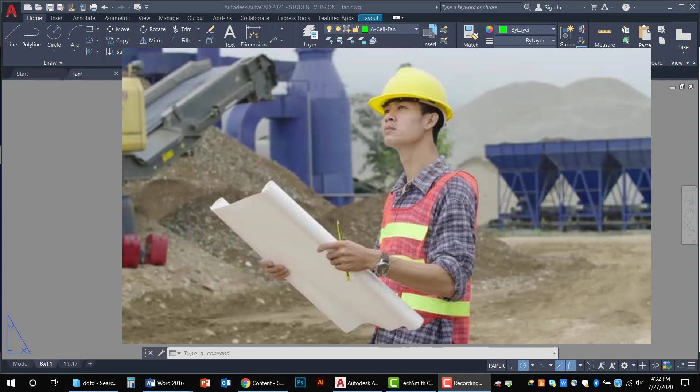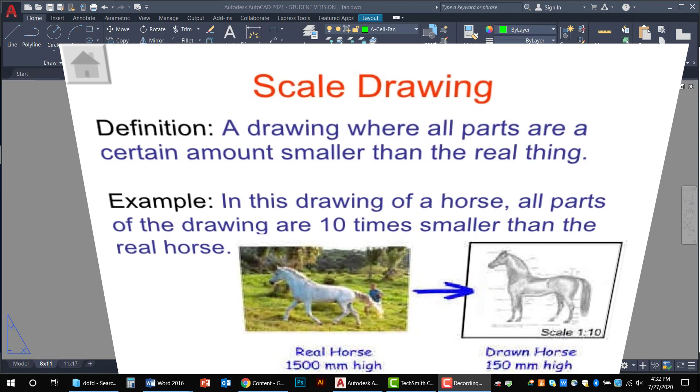Printing your drawings to scale is super beneficial to people who are out on the job site who may not have access to a computer, because there might not even be electricity on the job site yet. A scaled drawing is a smaller version of the object that is going to be built, and it's also a measurable version. Using an architectural ruler, we can measure just about anything that is sized to fit on a piece of paper so that we can build it in real world sizes.

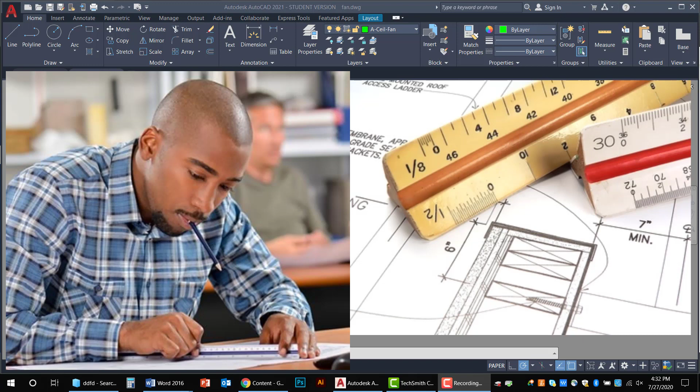For instance, if something is scaled to 1/4 inch equals 1 foot, it simply means that for every 1/4 inch that you measure on the paper, that 1/4 inch should be measured as 1 foot out in the real world.

Once your page setup is complete and you have the correct size pretend piece of paper with the right printing boundaries, and you have a title block set up, the next thing to do is position your drawings within the title block. This square that you see right here is called a viewport.

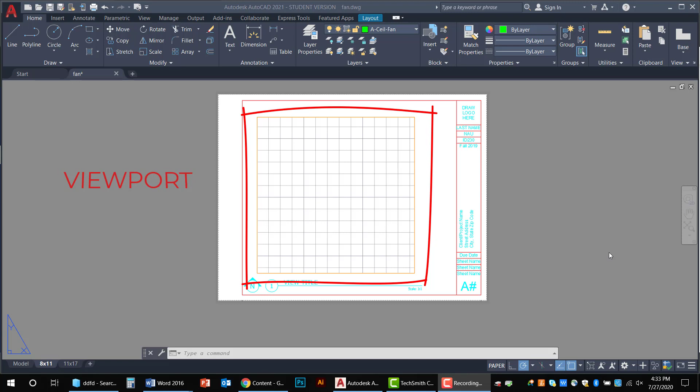A viewport is basically a wormhole into model space, or if you want to look at it this way, the border you see is merely a picture frame. So your picture, or what you see inside the frame, is model space.

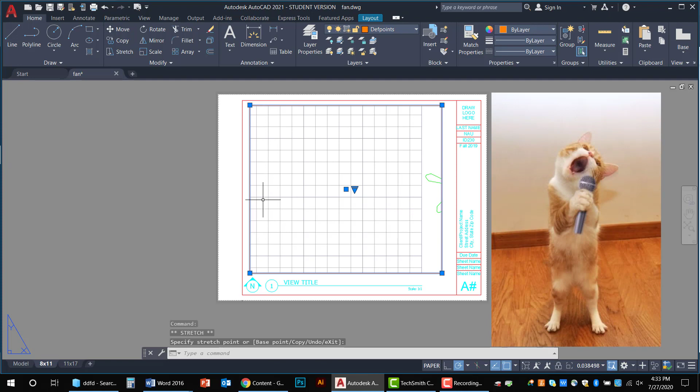Now you can size your frame any size you want by simply clicking on it and moving the grips around. You can also size the picture inside the frame, and we do that through what's called scaling.

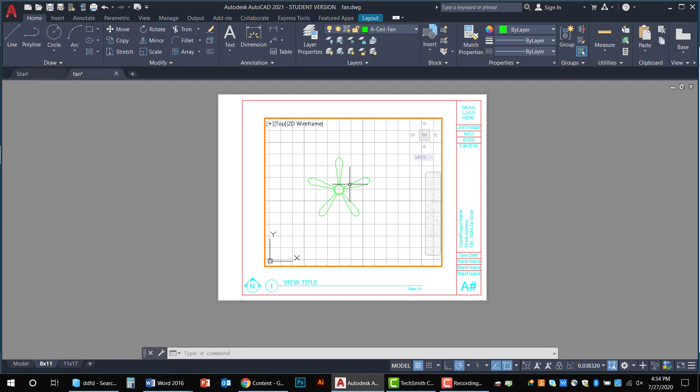Scaling is basically zooming in or out on the picture that we create, but in a way that can be measurable. If you double click inside, you can use your pan hand, you can use your center wheel to zoom in and out, and that's all we're doing, zooming in and out. I'm going to double click outside to unactivate the picture so that then I can just work with the frame.

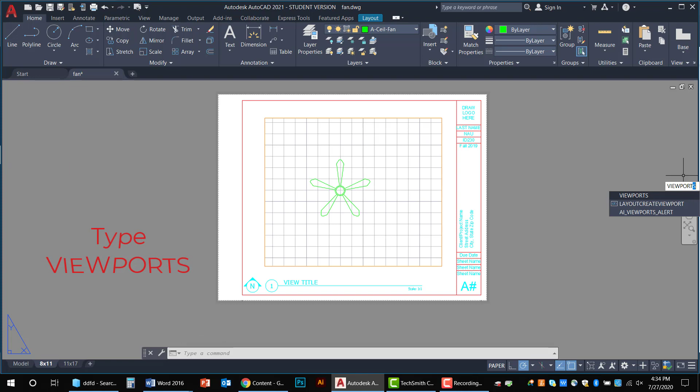See how that works? Now, if you don't have a viewport in your layout, you can add one. Simply type viewports, enter, and this window pops up, and you can decide what kind of viewport you want.

I almost always choose single and click OK. Then your cursor prompts you to draw a rectangle, just like the rectangle command that we learned earlier. Once you click that second click, it becomes a viewport, and you can see everything that you have drawn thus far.

I'm just going to get rid of that one because I don't need it since I already have one, but I do want to point out that some sheets in your construction document set are going to have multiple drawings, and some of those drawings get their own viewport because the drawings might be scaled differently from one another.

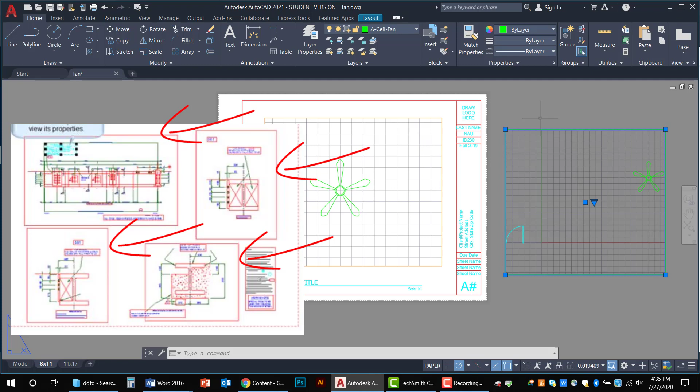So know that it's okay to have multiple viewports on a single sheet. It's just that for some of these smaller sheets, like what we're doing with 8x11 and 11x17, you probably only need one. So I'm going to go ahead and delete that.

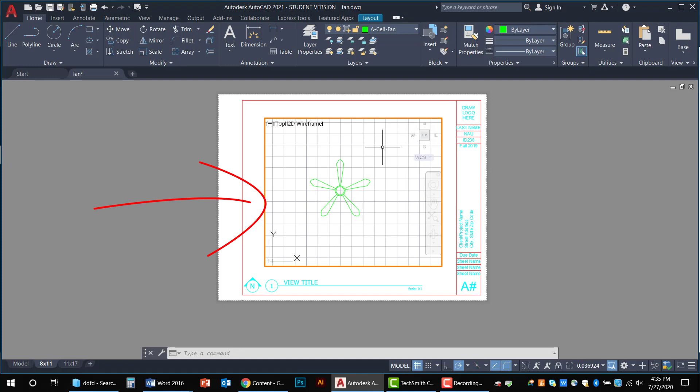So I just want to double click inside the viewport one more time. This is called activating the viewport. The border gets bold when the picture, or model space, is activated, and you double click outside of the frame in order to adjust the frame itself.

I just wanted to show you this because it's super important for understanding the behavior of viewports. Whenever you see the grips, you know that you are working on the frame aspect. When you don't see them, but you do see that the border is extra bold, that's how you know you're working inside of the picture, or model space.

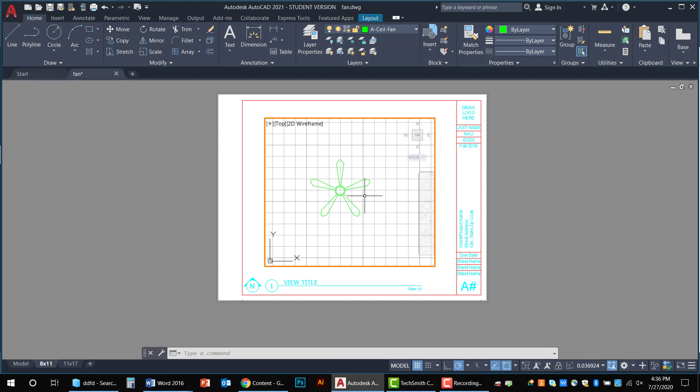Now this frame will have its own layer, and that layer is called defpoints. Def points is a layer that you see on the screen, but it never ever prints. My template already has def points. If I come to layer properties and scroll all the way down past the A's, here is def points. Now if you're not using the template, you do not have this layer, so simply create a new layer and name it def points.

It can be all small letters, or you can put a capital D. I think it remembers either way. Don't forget the S on the end of it though. So AutoCAD actually knows the name of this layer.

Again, you can come here and create a new layer and name it defpoints. I'm just going to exit out because I already have defpoints. AutoCAD already knows the name of this layer, and once you name it, it's going to update the layer with all the parameters, including the ability to be seen and not printed, which is what this little printing icon is right here. So if you look closely, like a wall, it looks really bright, but on defpoints it's kind of grayed out. That's how you know that layer is not going to print.

I always choose a color for defpoints that is not in the AutoCAD color bar. When I double click on the color, it brings this up — these are the AutoCAD colors. This is what your plot style will read. Your plot style will not understand any of these colors, but because defpoints is not a printable layer, I don't care. I want a color that I can recognize separately from these, so I always pick orange or purple, whichever one you want to work with. I tend to go with orange more than anything. Once you have your color picked, click OK, and here you are.

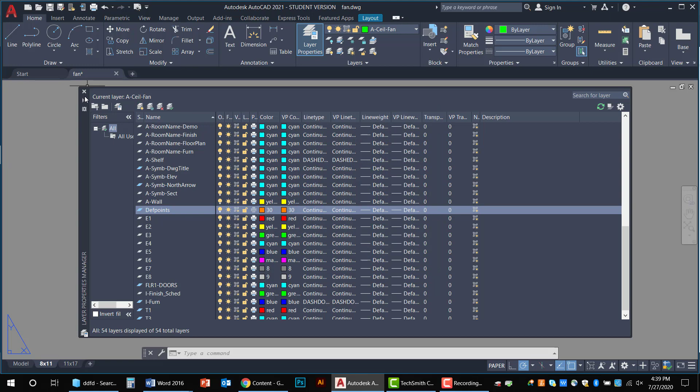I'm going to cancel out of this and come back here. If I click on that, you can look up here — it is assigned to the defpoints layer. If it's not assigned to the defpoints layer, simply click on the scroll bar, find it, select it, and it will assign just like that.

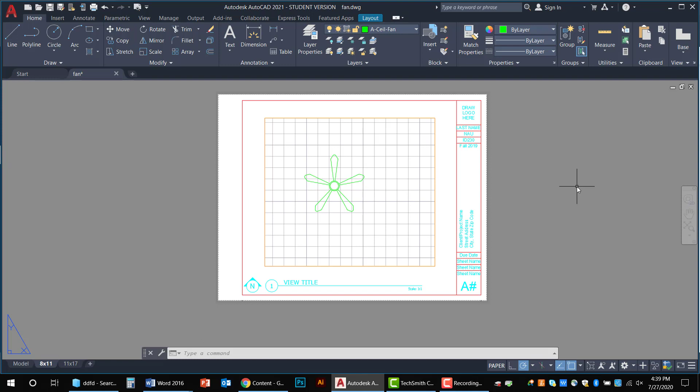There's defpoints. So once you have your frame size set on your paper space, like within this title block drawing area, and since we don't really know what it's going to be doing, I'm just going to drag it out something like this. Then it's time to start scaling the picture inside the frame.

You start scaling by either activating the model space by double clicking inside, or you simply click once on the frame itself so that you see the grips. Either way works, but once it's selected or activated, you should see a new option down here. Things change a bit, and you'll see a scroll bar with something that looks like a decimal number. When you click on that, you'll see all kinds of scales that you can work with.

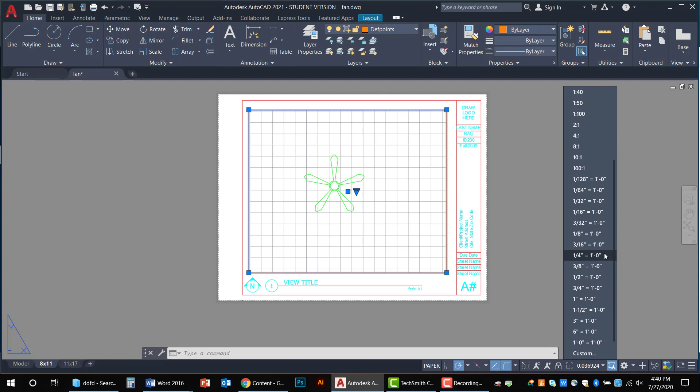Now these ratio scales, like 1 to 8, 1 to 10, are more of an engineering scale, and those are for super scaled buildings or things like that. But we're architectural, so we deal with these types of scales down here. Let's set our ceiling fan to 3/4 inch equals 1 foot scale, and what it'll do is bring it up.

Now sometimes it'll happen that you can't see your drawing in here. It's okay, just double click, and you can always use zoom extents to find it, or use your pan hand to drag it around. But I always try to center it within a viewport as best I can.

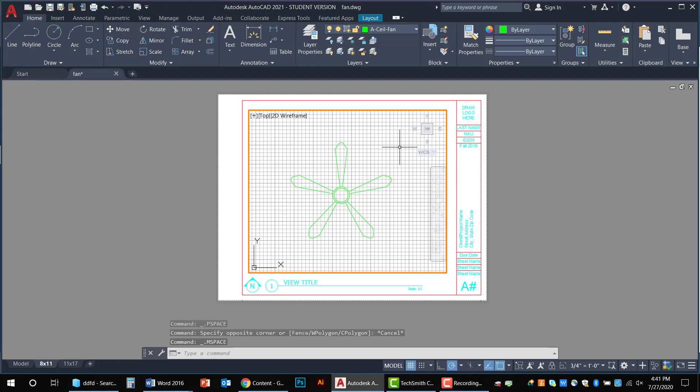Now if you want to get rid of that stupid grid you see down here at the very bottom, right next to where it says model, it's the grid mode. Just click on that to turn the blue off, and you'll see that your grid goes away.

Now if for some reason when you activate a viewport you don't see this navigation bar — it happens from time to time — just type NAVBAR and hit enter. Even if it doesn't show up, click out and then click back in, and then you should see the navigation bar all over again.

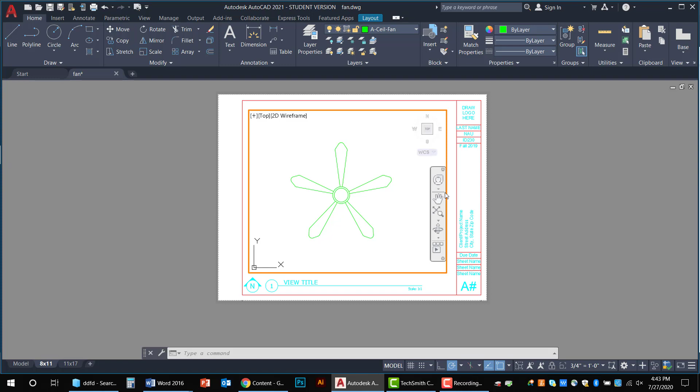Once you have the object scaled to fit inside the title block, I suggest that you lock your viewport. I also suggest that you make the viewport kind of snug around the drawing. We don't need big giant viewports taking up everything. I always try to keep things concerning whatever drawing I am scaling around that drawing.

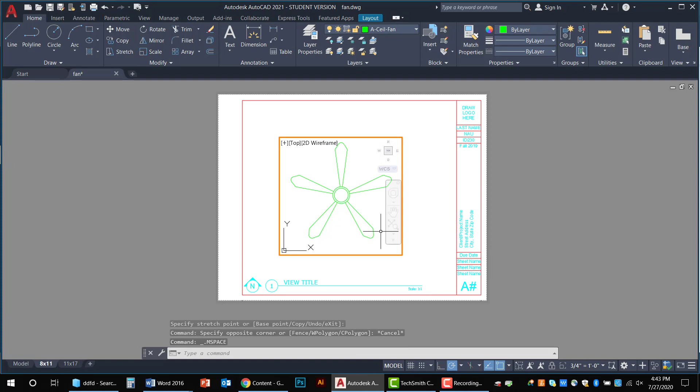To lock your viewport so that you don't accidentally bump it—as soon as you change the zoom of your viewport, it's no longer scaled. You can tell by coming over here and looking, and yep, it's not on 3/4 anymore. Let's get it back on 3/4 and get this centered. Here we go.

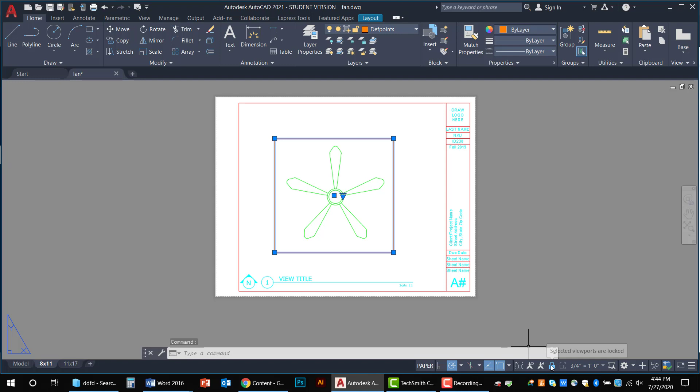Just click this little lock down here and it will lock it, turn it blue, and now you can't accidentally zoom in or out—you're just zooming the actual page. So that's always a good trick: as soon as I get it scaled and positioned, I grab the viewport and hit the lock button. Of course, to unlock it, make the lock unblue, and there you go.

Is unblue a word? I don't know. I kind of like it.

Unblue. Alright, so once you have your image in your viewport and it's locked and set, come down here to the drawing title and fill out the information. Double click on it and you'll see it has a little window, and you can click on each one to decide what to give it. Always name it for what it is—so this is a ceiling fan.

Some people are okay with it not being all caps, and some want it to be all caps, so just check with your project manager or instructor to see what they want. I'm cool with it not being in all caps. So: ceiling fan, and then I'm going to add a dash, plan view.

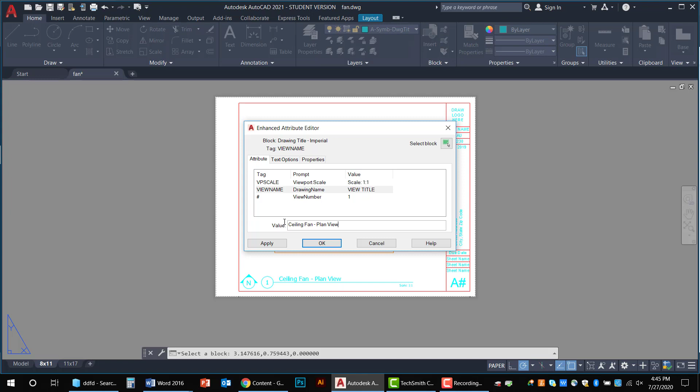It's always good to indicate what view this is—is it an elevation, a section, or a plan? Now the view number is the drawing number on the title block. Some title blocks will have multiple drawings—drawing 1, drawing 2, drawing 3. Since this is the only drawing on this sheet, it's just going to stay at 1.

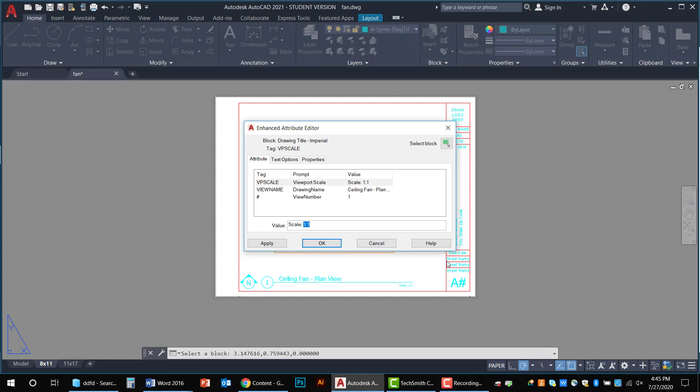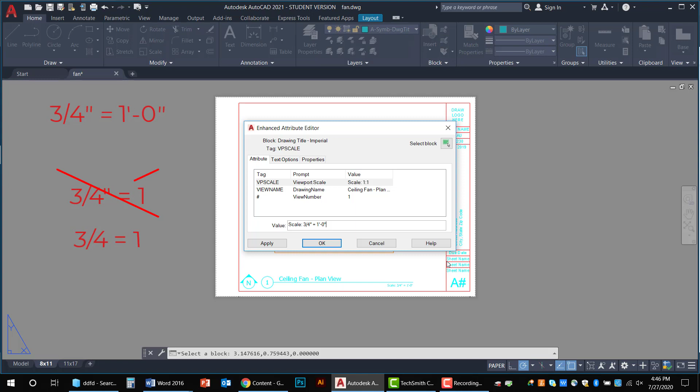And then I need to update the scale because it's not a 1-to-1 ratio—it is 3/4 inch. Make sure you put the quotations, space, equal sign, space, 1 apostrophe dash 0 inches. Make sure your scales always read this way. Do not leave off the dash 0 inches, do not put 3/4 inch equals 1, and don't forget the quotations. They should always look exactly this way. This is tradition, this is what is expected on CD sets, so it's up to you to learn the traditions.

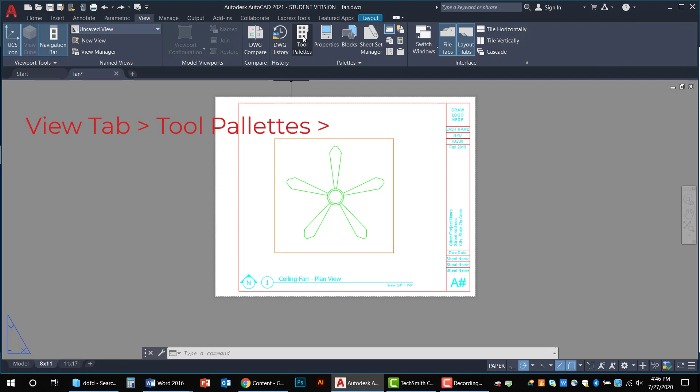Now, some of you might not have this drawing title, which is what that is essentially called. If you want to find it, go up to the View tab in your ribbon, go to Tool Palettes, find the Annotation tab—usually the third one down—and it is Drawing Title Imperial. If you're working outside the States and use the metric system, go all the way down to find Drawing Title Metric. But here in the good old US of A, we use Imperial.

So Drawing Title Imperial—click on it and you'll see that you can bring it down and it creates a new drawing title for you.

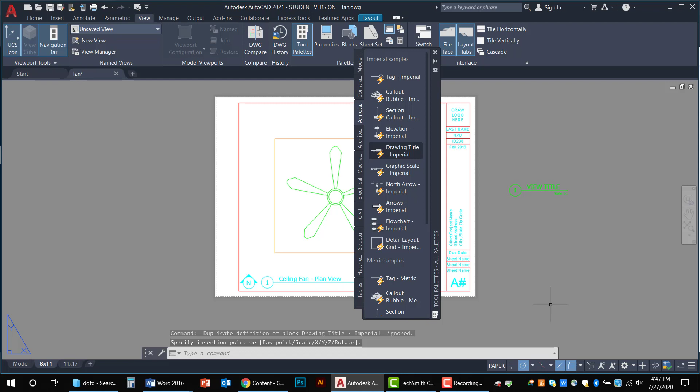It's good for a drawing title to be located close to the object, but not too close, if that makes sense. You need some breathing room—don't crowd it out. This isn't a protest, people, this is social distancing done right: not too far, not too close.

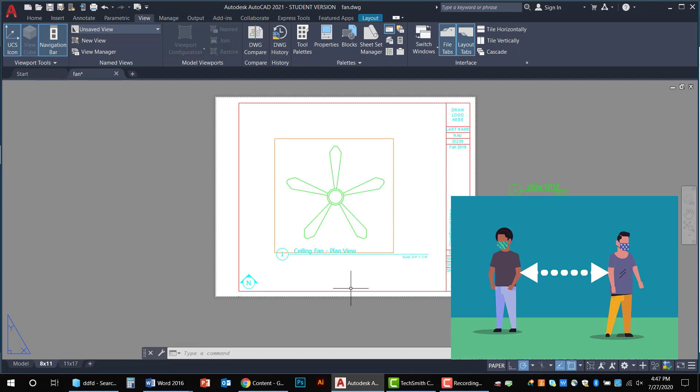The other thing that's good is to make sure your line—so the circle should just be to the left of the object, and the end of this line should be just to the right of the object. It should overlap just a little past the far edge, but not too far. It's kind of a balance thing, and sometimes it takes a couple tries to understand. So we've got social distancing practices right here, with a little overlap on each side—close, but not too close, not way down here. It's super important that these drawing titles are associated with the object itself.

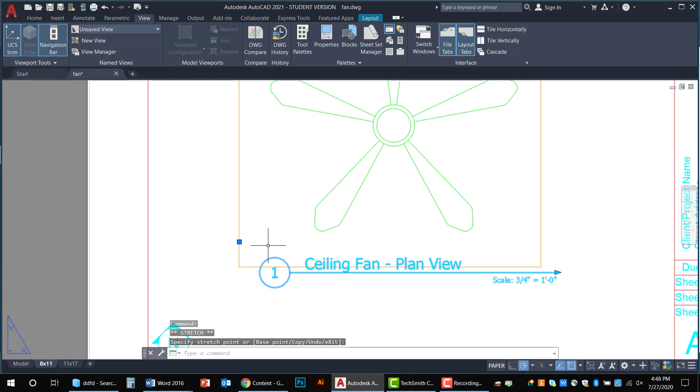I gotta bring this back over a little bit because it was kind of not overlapping.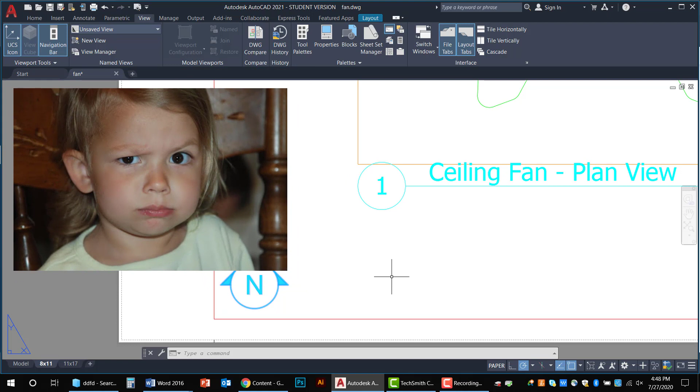Anytime you have a plan view, you should also have a north arrow. I drew this north arrow and then blocked it. You can't really find a good north arrow in AutoCAD. If you saw the one AutoCAD has, you'd wonder what in the heck that is—it's huge and weird looking. So this is a typical north arrow: just some text, a circle, some lines, and I filled it in with hatching, which you haven't learned yet. But I just suggest you make your own.

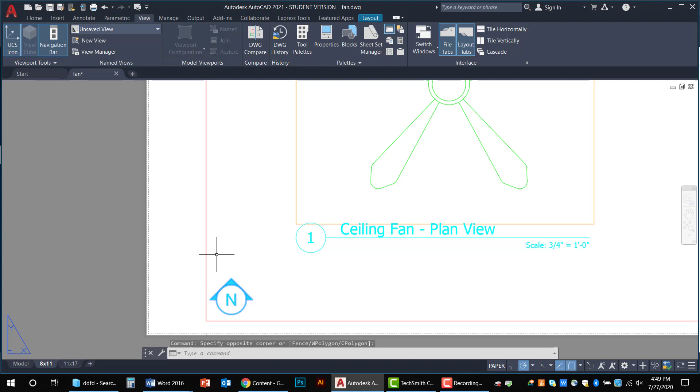Anytime you have a plan view of anything, you should always have a north arrow indicating exactly which direction north is, and it should be somewhat assimilated here. So I used the move command and moved it up. Something like that is what you're looking for. I do want this a little more centered, so I'm going to grab the move command and move it over just slightly.

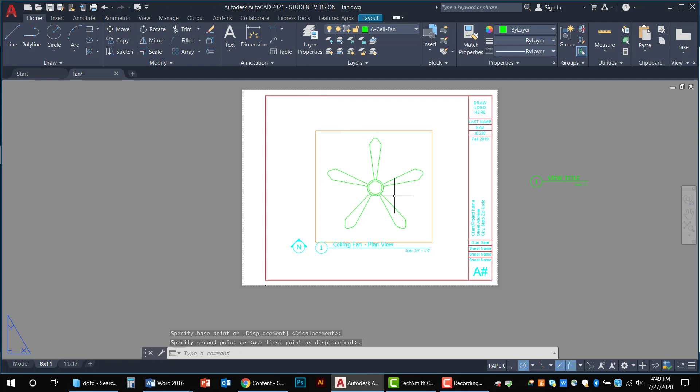There we go. Of course, you want to update all your title information that you have right here—what's the due date, what's the sheet name, your project information, all that kind of stuff. But this is basically what you're going for.

Once you're here, do a print preview or plot preview, and you'll see that everything is now in black and white. You can also really tell the line weights—this is a red line and that is dark and bold, while the rest is not quite as dark and bold.

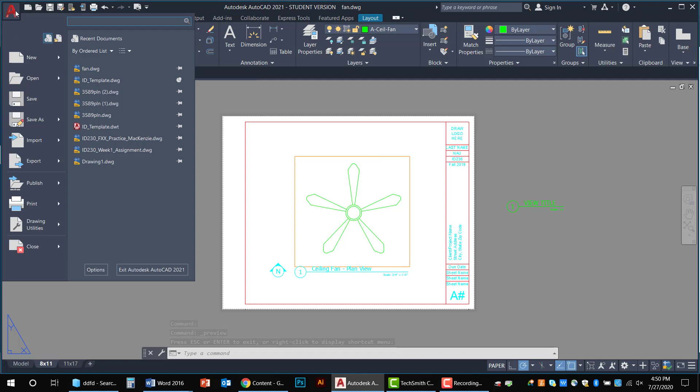Once you're done with that, I'm going to go up here to the big red A and hit print. Sometimes this pops up—a batch plot is when you have multiple layouts and you want to plot them all out at once. I just want to do this one layout, so I'm going to continue to plot a single sheet.

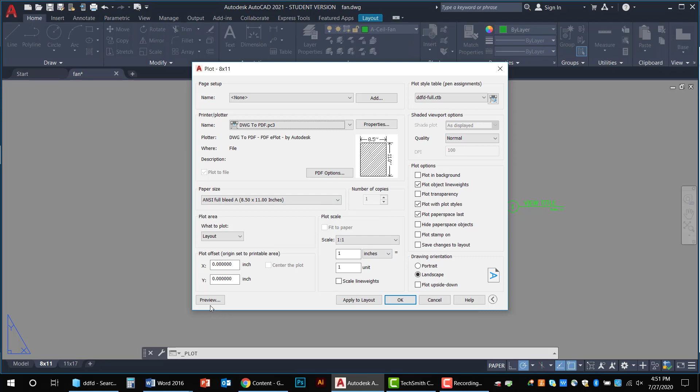You'll see this pop up, and once again this is what your page setup looked like, so if you did everything correctly, just double check: DWG to PDF, ANSI full bleed A, landscape, DDFD full. I can always do a quick preview check one more time. It looks good, so I'll hit X out of here and then hit OK.

The next thing it's going to ask is where you want to save this PDF, since it's a digital print, not a physical print. So I can decide, maybe I just want to put it on my desktop for now, and then name it according to my naming system. Here at the school I teach, that's something we're really fond of doing. I'm going to say P1 because this is just practice, then my last name. There we go, click Save.

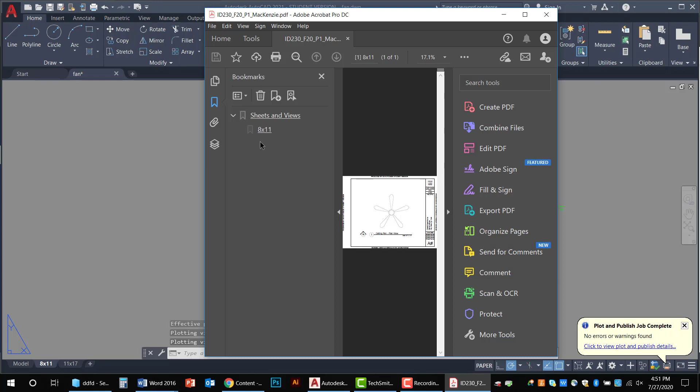It will save it, but then it will also give you a preview of what that PDF is going to look like. Then you take this PDF file, print, and find the physical printer in a room that you want to print to an actual piece of paper.

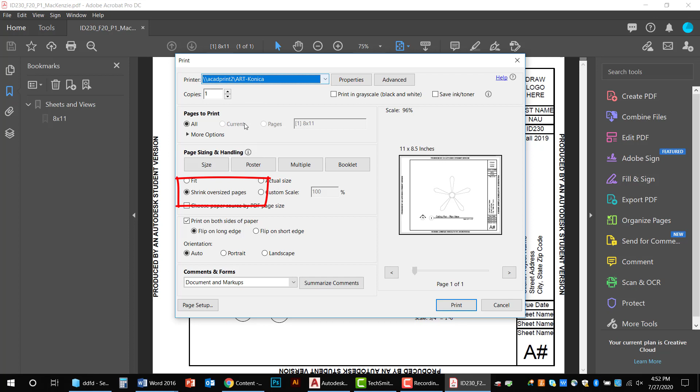Now the thing you've got to watch out for is that some of these printers like to shrink oversized pages. That means if you print this and it shrinks, it's no longer a scaled drawing. So always make sure you have actual size checked. If you don't, you could be in trouble. That's really the only thing you have to make sure is handled when you get to this part.

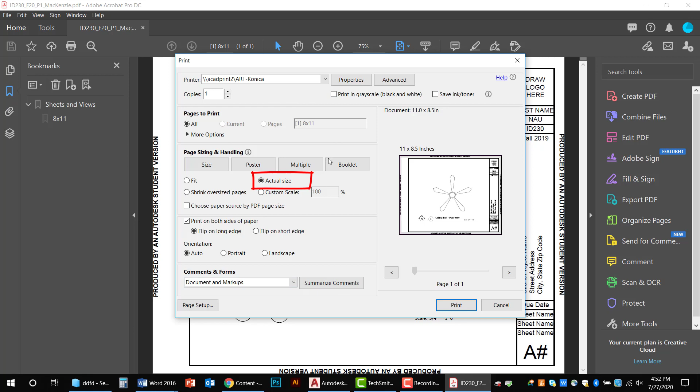And then you hit print, and I just printed to that printer. It's pretty simple to print.

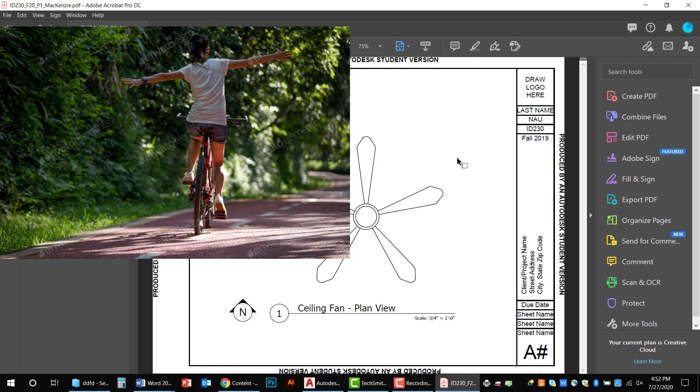This is kind of a process, guys, and I'm sorry it takes a little bit, but I promise once you've practiced and printed a lot, it's going to feel like riding a bike—you're just going to know how to do it over and over. It just feels super awkward at first. You've got a series of steps to follow, so maybe it would be helpful to write down those steps so you can hit them every time, and eventually you're not going to need that list anymore. You're just going to know how to do this, okay?

Well, that's all there is to printing. We're on to the next video.